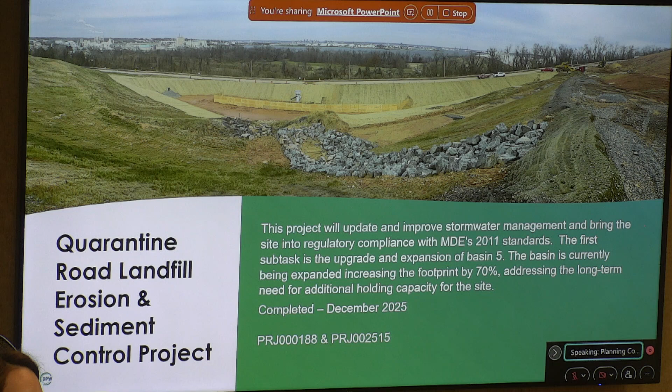Here's the Quarantine Road Landfill Erosion and Sediment Control Project. This project will update and improve stormwater management and bring the site into regulatory compliance with MDE's 2011 standards. The first subtask is the upgrade and expansion of Basin 5. The basin is currently being expanded, increasing the footprint by 70%, addressing the long-term need for additional holding capacity for the site. This was completed in December of 2025.

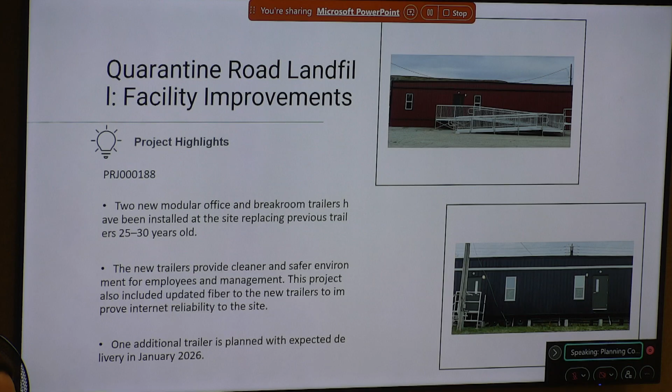Regarding some of the facility upgrades, these are two new modular office and break room trailers that were installed at our Quarantine Road landfill, replacing trailers that had been there for 25 to 30 years. This is definitely an improvement over what previously existed. The new trailers provide a cleaner and safer environment for employees and management, and this project also included updated fiber to the new trailers to improve internet reliability to the site. We have an additional trailer planned to be delivered this month, January of 2026.

Also, improvements to the existing structure at Bowley's Lane, an improvement to the restroom locker room areas. You can see that new plumbing has been installed, and then you have the framing for new walls and other things that have to be placed in that location.

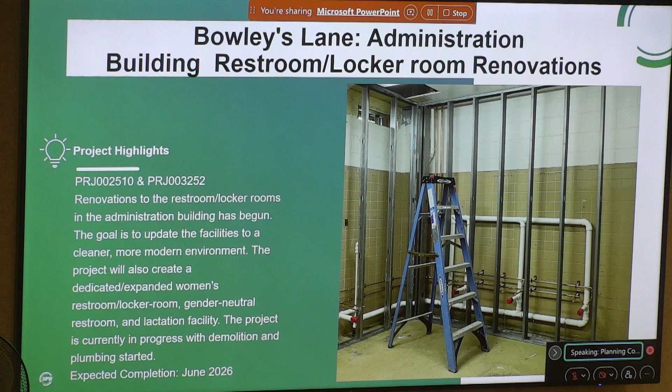Neiman Avenue, which is our foster home, for lack of a better term, while the improvements are being planned and scheduled for our Reedbird location. This is one of the structures that we had placed there to make sure that we are addressing health and safety and clean working environments for our employees.

While you're doing that, let me ask a quick question. Are these trailers all substantially the same as each other? Do you buy them off the rack, so to speak? No. We get them constructed based on need because some locations have more employees, and there's also, say, gender concerns where there may be more females at one location than another. So does the city have some sort of pre-existing agreement with a trailer vendor for cost effectiveness? It seems like a lot of trailers, which are obviously a welcome improvement, but I'm just curious.

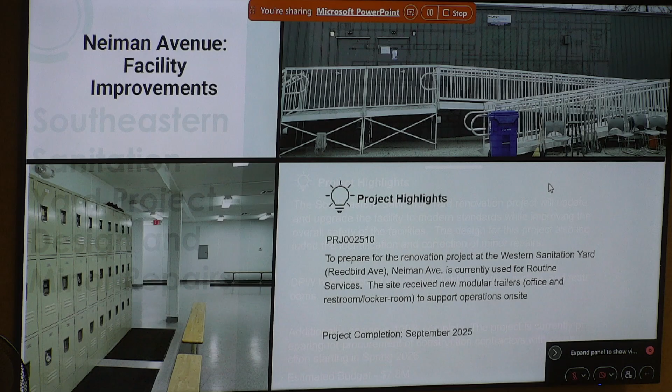So this is just a schematic of our location at the Southeastern Sanitation Yard, located at Kane Street. We are happy to report that the design for this is 100% complete, and this will definitely improve the existing structure, providing new lighting, HVAC, roofing, and restroom facilities. That's just a brief overview of what's happening at Kane Street.

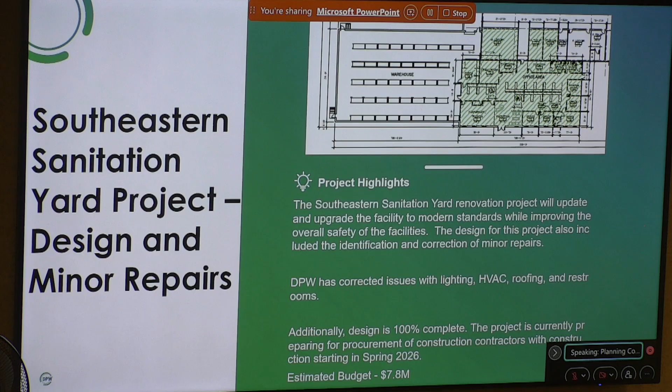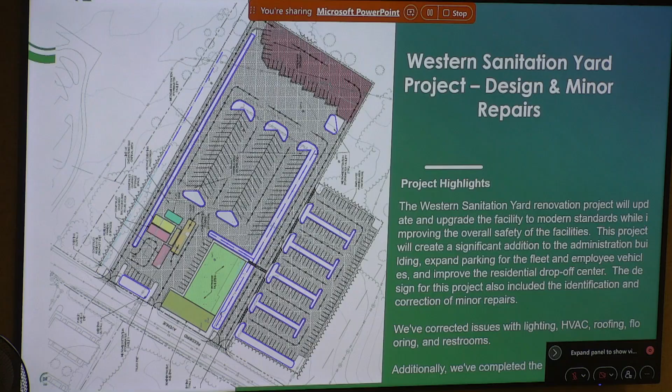This is the Western Sanitation Yard, the Reedbird facility, which is under design right now. This will provide a lot more flexibility, not only for operations but for our employees as well. New facilities, new administration areas, parking - you name it, this will cover it.

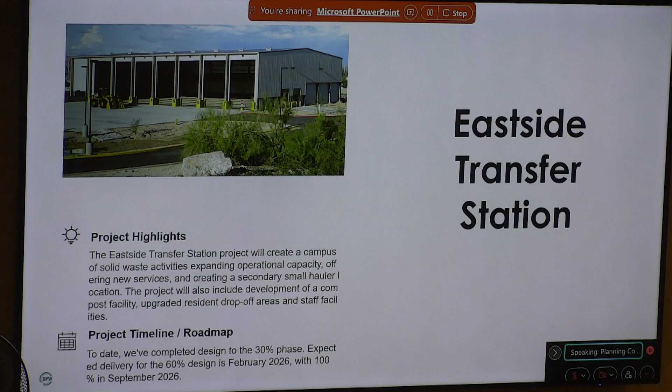East Side Transfer Station is 30% complete for design, and we expect it to be at 60% next month, February of 2026, with full design completion in September of 2026. This will expand several of our operations regarding solid waste, as well as small hauler and potentially other activities such as composting.

And to speak to some of our current projects that are ongoing, I'll introduce our Chief of Disposal Services, Mr. Antoine Bird. Good afternoon, everyone. Antoine Bird, Chief of Disposal Services for DPW.

So we'll talk about a lot of our current projects that are going on right now. Kendall went through a lot of them, but we'll go into them in a little bit more detail - budgetary concerns, and then overall scope and details. I'll say overall, our goal for a lot of these projects is to move towards zero waste instead of just disposal. So we do have a lot of attributes as a part of our scopes that push into that direction with a lot of the changes that we have going on to some of these sites.

So first one we'll talk about is Quarantine Road Landfill. Overall, this is a project to do an expansion on the landfill, which would increase the life from what we currently have to an additional 14 to 18 years, depending on our volume intake. Based on our current volume, we'd probably get between that 14 and 15 year time frame.

Right now, we're just working through the approval for the stormwater management piece. The road relocation piece is a $35 million project in itself, but overall the project is a $115 million budget for the road relocation and the creation of the two new cells. So phase two would be the creation of cell M1, which we expect to start construction in FY28. And then phase three would be the construction of cell M2, which would start in FY29.

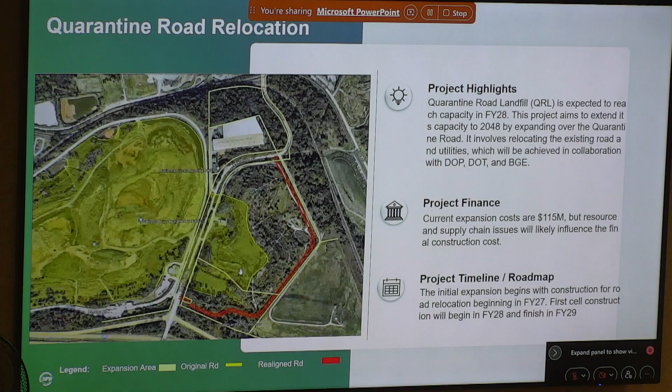The next one is the Southeastern Sanitation Yard, or Kane Street Yard. This project, again, is all about renovating this site. So the overall plan is to completely overhaul this site with a full gut renovation, including the office space, the warehouse, and the overall garage space, which houses our special services and our street sweeping operations.

We've done a ton over this year, including getting the design to 100%, but we've also done a lot of work on minor repairs, addressing roofing issues and HVAC issues over the summertime, and trying to create some more accessible restroom areas. Overall, for the renovation, the budget is $7.8 million, and we have put this in motion to go out to bid this month. So we're expecting to start construction this spring, and it'll be a one-year construction timeline.

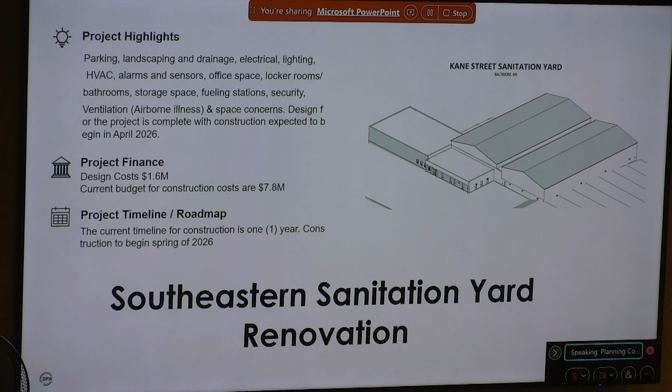The next one is the Western Sanitation Yard of Reedbird. Again, we've talked about this from a minor repairs aspect, what we did just to make sure the site was in operating condition in the early part of last year. And then we closed it down to make sure we can continue to move forward.

From a design perspective, we are at 90% on this design, and we're currently working through some regulatory and permitting approvals right now to be able to move this forward. Our current estimate on this project is $17 million.

This project is going to pretty much expand or overhaul the scope of what is currently there, replacing modular facilities with an actual building, creating space for over 200 employees to congregate and have a lunch space or meeting room space, in addition to renovating the current existing administrative building. Additional features include updated truck wash, updated parking for not just employees but also our vehicles, and increasing and expanding the capacity for our residential recycling centers, creating a more safe and streamlined approach to being able to utilize that facility.

So a lot of upgrades to that site. Overall, the design, we want to keep it very consistent with what we have next door with Middle Branch. So from a design features perspective, we've utilized that as a model to improve the visual facade of the overall area, because it is a solid waste sanitation yard, but it doesn't have to look like one. So that project is currently moving forward.

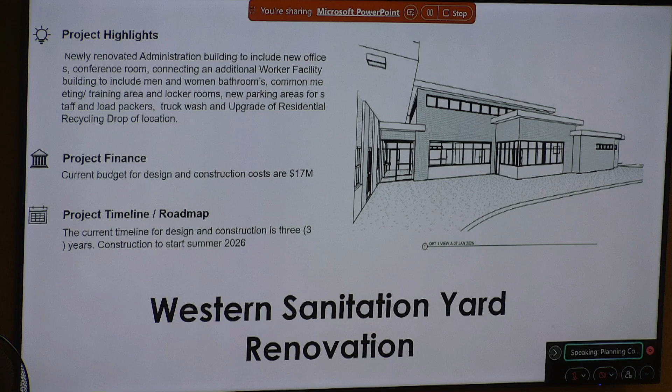A good chunk of this project is ARPA funded. The rest is covered through our CIP, but it's really addressing health and safety to make sure this administrative building at this site is comfortable for our workers. So we are expanding and extending our women's locker room with this, also creating a lactation room and a gender neutral restroom at that site.

The next one is the Bowleys Lane aerated static pile compost facility, and we'll talk about this more in conjunction with the East Side Transfer Station project. But overall, the scope of this project is to create a compost facility at the Bowleys Lane site that would allow us to process up to 12,000 tons worth of compost material per year.

The project is currently being designed with the East Side Transfer Station, and we're currently at 30%. We expect a 60% design within the next month or so. But overall, the budget for this particular one is about $8 million. We'll talk about what that larger number is for the entire complex.

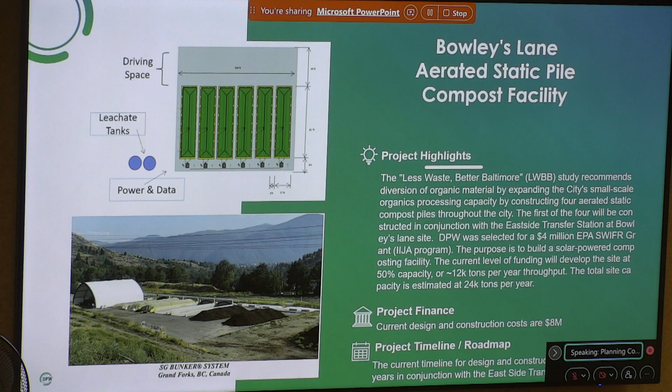So the next three slides, I'll talk about the East Side Transfer Station project. The intent is to create a campus of solid waste facilities at the Bowleys Lane site, which would include the sanitation yard for Bowleys Lane, the east side of it, the compost facility, but also introduce small haulers to that as well. So we'll be creating a secondary area for small haulers outside of the Northwest Transfer Station or the Quarantine Road landfill for them to be able to come utilize the facility as well.

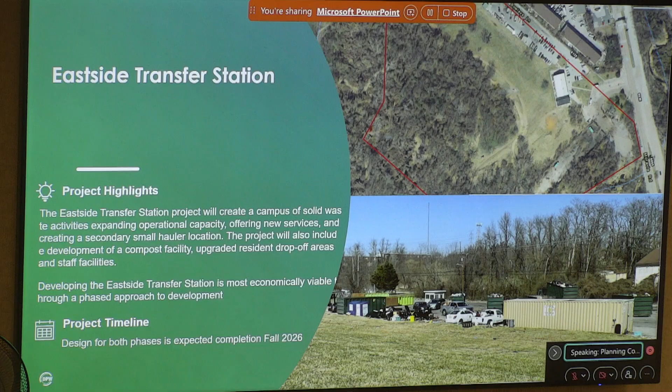So we've broken this down into phases. Phase one is really designed to create immediate needs for not just the community, but also our workers. Health and safety is a big thing we want to be able to improve for our workers.

With this one, in phase one, the intent is to create an administration building in addition to that, which would sit off to the side next to the current administration building. And again, akin to the Western Sanitation Yard, it's going to create additional space for offices and seating space for the management of the team at the site, but also create a conference room and lunchroom area for the workers at that site.

In addition to that, we are streamlining the residential recycling center, also creating that small hauler space to give us capacity that would be a third more than what we currently have at the Northwest Transfer Station. We've created the ability to queue a lot more of that small hauler traffic on site so that we don't have the similar challenges at the Northwest Transfer Station where the line wraps around the corner. We have created space for up to 30 to 35 vehicles to be on site while waiting to utilize the facility. And then also creating a compost facility and increasing parking for the vehicles and for our employees.

So that is phase one. The current construction phase on that piece has a budget of about $36 million to get us this piece. And then overall it's a 2-year build out, which we expect to start at the beginning of, the end of FY27.

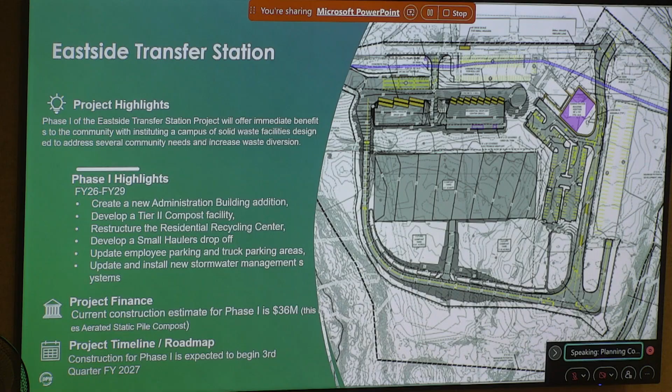The second phase of the East Side Transfer Station would expand on the back end of that site and create a transfer station specifically geared towards small haulers. The overall intent is to create additional space for small haulers to utilize this facility in a more efficient manner.

So what we have here towards the bottom of the screen is a facility specifically designed to allow small haulers to come in. They can dump inside of a building, we can manage that material, and then transfer it out from the site in a more streamlined fashion than just having them sit there waiting to utilize trailers.

We'll actually have floor space where we can build up and move that material when it's more convenient for us, rather than rushing to get a trailer back to the yard for them to continue moving forward. This would streamline our ability to manage that material more efficiently and also allow us to take in a lot more haulers in a shorter time frame.

To build out this expansion would be an additional $14 million on top of the $36 million, bringing the overall project to $50 million, with the expectation to roll this out by 2031 for construction.

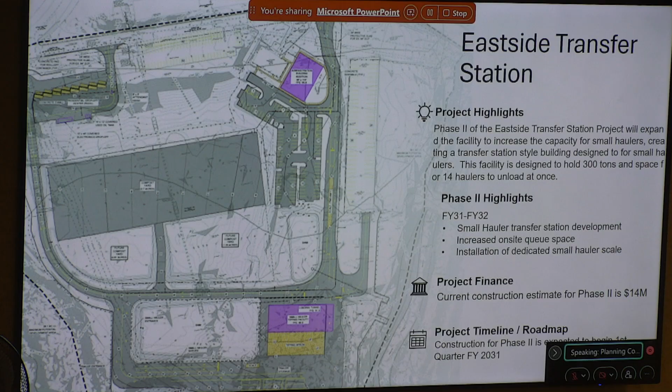The next project we'll talk about is the long haul study. I believe it was FY25 when we received $500,000 for a long haul study, to go out and see what the feasibility would be to create, whether it's rail or some other method, a way of moving waste long haul. Our preferred method is rail, and that was indicated in Less Waste, Better Baltimore.

But overall, this study has morphed into not just a rail study, but more of a waste diversion feasibility study. So what we're trying to do is create a roadmap that tells us exactly how we need to move forward and what facilities we need to get to the point where we are really getting extremely close to zero waste in its efficacy.

The scope of that study is going to produce information on a rail transfer station, a construction and demolition transfer station, a mixed waste processing plant, a materials recovery facility, a second transfer station, and the expansion of any current solid waste facilities that may be available. We're expecting the initial results of this study in the summer of 2026, with an extended piece producing additional information coming out towards the end of the year.

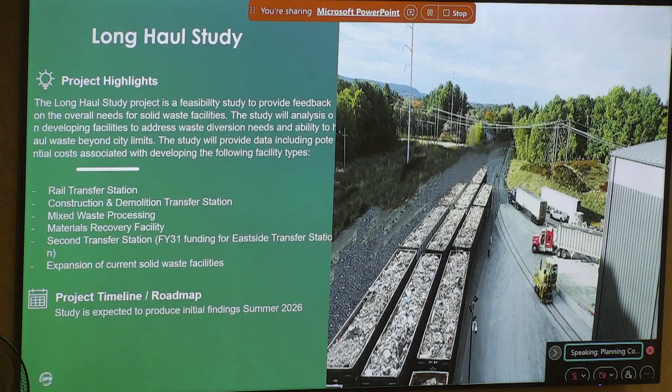Before you go to that, is there another slide on this? No, this is the only slide on this. Okay, yeah, I just want to add something here.

This is where we stand currently; this is what our current capital program looks like. Antoine mentioned the Quarantine Road landfill, about $115 million expansion. The question that this project is going to answer for us is whether the landfill expansion project is the best and highest use to further our needs. As Antoine mentioned, you are looking at about 15 years of additional capacity in the Quarantine Road landfill.

That is assuming incineration continues with Bresco. As we know, the desire is to get away from that, to not utilize it. If Bresco is not utilized, that decreases our use to about 4 years. So the question is: is $115 million for 4 years worth of landfill capacity the best and highest use of our investment? That question, I am not prepared to answer.

My gut is telling me that there might be another way to do that, and that is the purpose of this study: to see what else is out there, and if there is a need, way, or possibility to pivot with that investment in our landfill to actually make some meaningful progress on zero waste. But what we are presenting is what the capital program to date looks like, and there are still some questions out there as to what recommendations we might be bringing next year to actually make some changes in our approach. So I just wanted to mention that.